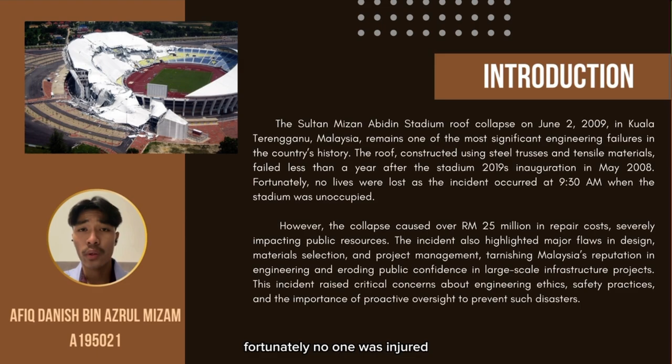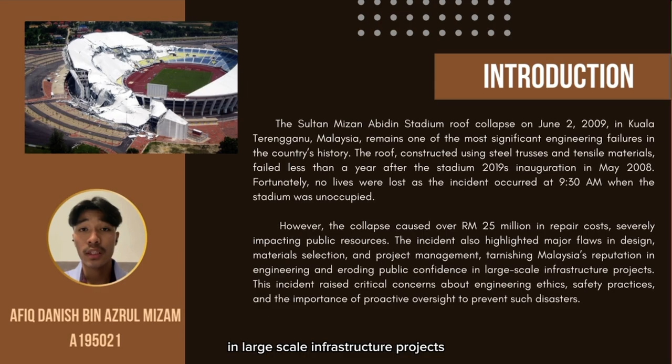In 2009, the roof of Sultan Mizan Abidin Stadium in Kuala Terengganu collapsed less than a year after its inauguration. Fortunately, no one was injured as the stadium was unoccupied at the time. However, the collapse caused over RM25 million in damage, highlighting flaws in design, materials, and oversight. It also tarnished Malaysia's engineering reputation, raising concern about safety and project management in large-scale infrastructure projects.

Now let's look at the conflict that led to this incident. There were three main problems: design, material, and construction.

First, design problems. The roof was not designed to handle the weight and pressure from bad weather like strong winds and heavy rain. There were no safety buffers in place to protect it from these stresses, making the roof weak. Second, material issues. Cheap, low-quality materials were used to save money, but these were not strong enough to handle the stress from weather, which weakened the roof further.

Third, construction mistakes. The roof parts were installed poorly and did not follow the approved design. Workers made mistakes, and due to the lack of proper supervision, these issues went unnoticed, weakening the roof even more.

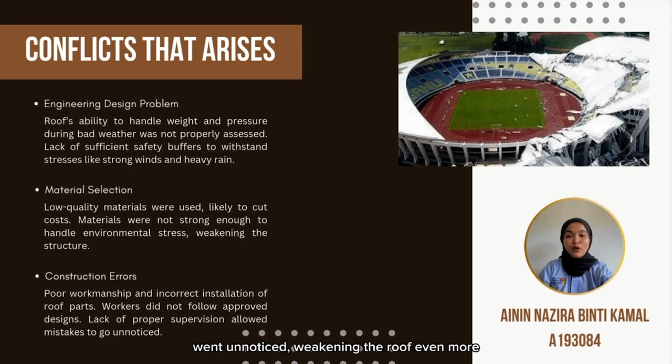So the next part is factors contributing to the conflict. There are three factors. First, design error. Design error meant the roof construction was not strong enough to withstand dynamic stresses like vibration and wind. Poor craftsmanship was also apparent, as steel components had faulty welding.

Second, construction and installation mistakes. This was caused by a 30-meter space between the concrete stump and buttress, as well as poor welding and fastening. The weight on the roof was more than the buckling capability of certain important parts.

Third is poor project management. The team lacked the expertise to manage such a complex project. In order to quicken the schedule, quality control and safety precautions were neglected, which resulted in inadequate maintenance and gradual structural degradation.

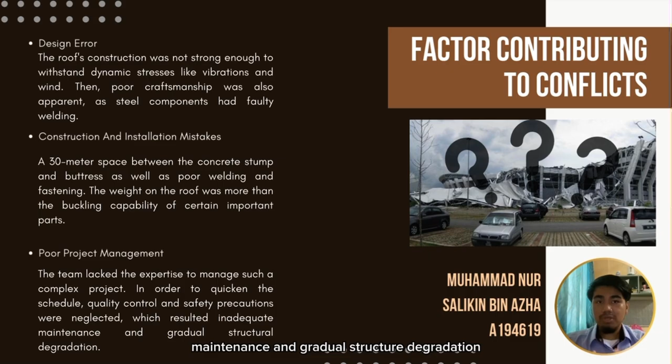The Sultan Mizan Abidin Stadium roof collapse incident in 2009 highlights the serious consequences of neglecting key engineering and construction considerations, and brings up issues in ethics, safety, health, community, and environmental aspects.

From an ethical aspect, we can see that the project faced allegations of corruption and mismanagement due to unchecked engineering design. The authorities showed poor oversight and lack of using safety materials in the design, compromising the project integrity, violating professional standards, and eroding public trust.

From a safety and health aspect, the collapse reveals significant safety failures, including a roof design unable to handle environmental load and the use of substandard material. This issue occurred due to faulty construction practice and inadequate inspection, which ultimately led to the failure.

Furthermore, the collapse disrupted local events and economic activity, harming businesses and the economy, and straining public resources for repair. It also damaged Malaysia's reputation for engineering reliability, diminishing public confidence in future infrastructure projects.

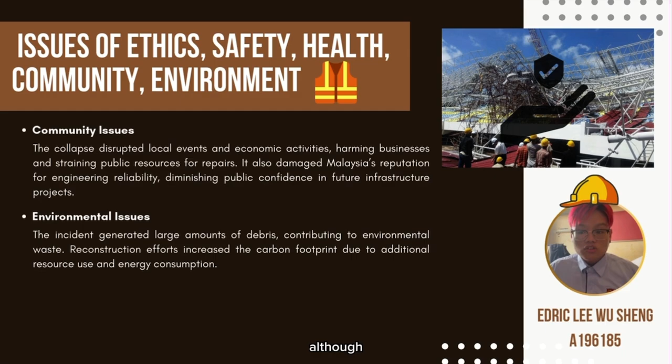Last but not least, this incident caused a lot of debris, which contributed to environmental waste. Although reconstruction of the roof was carried out, this will also increase the carbon footprint due to additional resource use and energy consumption.

We proceed to the next part, which is the solution. There are two categories in the solution part: the conflict and ethical issues. For the conflict part, engineers should adhere strictly to local and international building codes, as this will help ensure the structure is safe and strong enough.

Next, engineers should improve their design, as one of the main failures was the large gap between the concrete stump and the concrete buttress. This gap should be reduced, and workers should also have proper welding skills during construction to make sure the connections between the steels are strong enough.

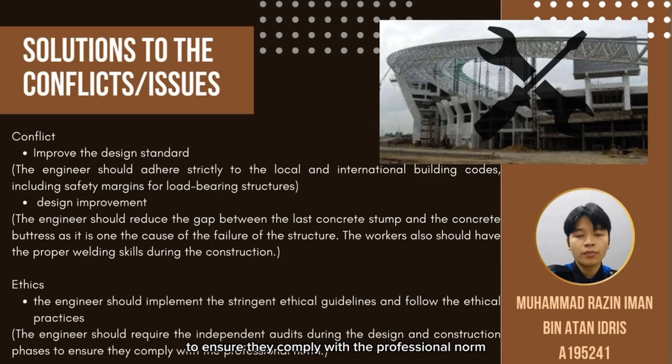Next, we move on to the ethical solution. Engineers should implement stringent ethical guidelines and follow ethical practices, and they also need to require independent audits during the design and construction phases to ensure compliance with professional norms.

There are a few lessons we learn from this incident. The first is the importance of making sure designs are strong enough to handle unexpected conditions. The second is engineers need to choose strong, high-quality material that meets safety standards to avoid problems in the future. The third is it is important to check the work regularly and make sure everything follows the right standards.

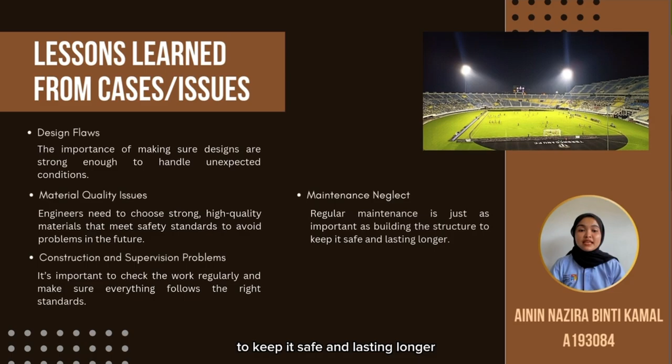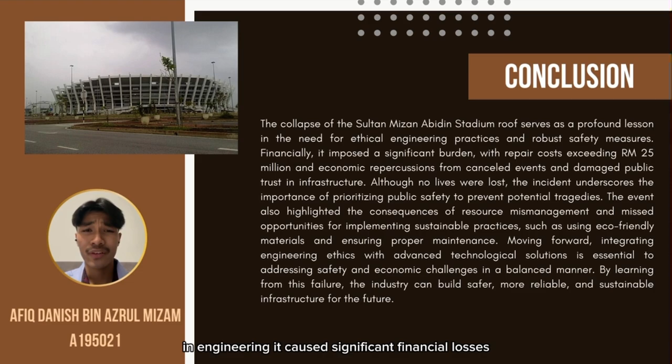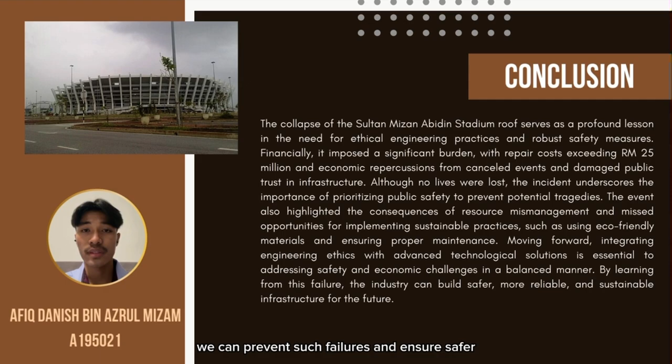And the last lesson is regular maintenance is just as important as building the structure, to keep it safe and lasting longer. The collapse teaches valuable lessons about the importance of ethics and safety in engineering. It caused significant financial loss and risk to public safety, underscoring the need for better design standards, proactive maintenance, and sustainable practice. By integrating ethics and technology, we can prevent such failures and ensure safer, more reliable infrastructure for the future.